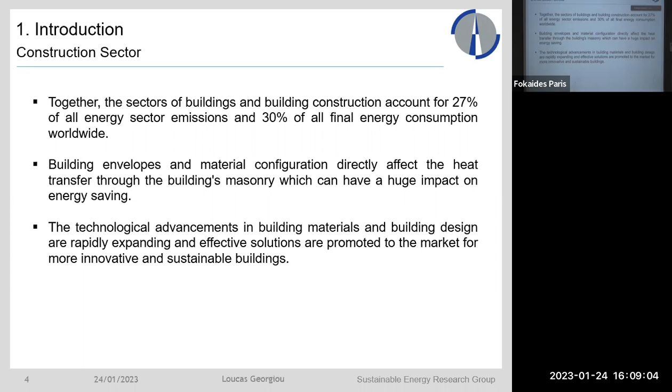Concerning the numerical tools, the concept of numerical investigation involves calculating the thermal performance of a building envelope with predetermined material properties and boundary conditions.

The need for the development of building efficiency techniques has pushed the situation where software tools can be utilized to investigate complex geometries and flow fields.

Numerical tools are utilized to predict and improve the thermal performance or capabilities of a building configuration.

This work numerically investigated three major case studies.

The first one concerns a double skin facade building element, which was integrated into the building envelope.

The second major case study was building elements enhanced with phase-change materials. And the third case study was a solar thermal system, which was integrated into the building envelope.

Regarding the double skin facade, this system is composed of two layers that allow airflow through the intermediate cavity. The ventilation inside the cavity can be natural or mechanical, and can absorb or release heat.

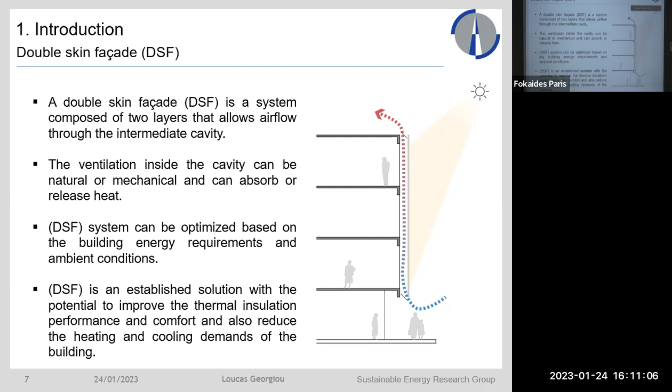A phase-change material is a substance that during a phase transition releases or absorbs enough energy to deliver usable heat or cooling. The transition usually takes place between solid and liquid phases.

Which are the two basic forms of matter. PCMs can be used in buildings to improve their efficiency by reducing heating and cooling needs. And recently, the use of PCM in construction...

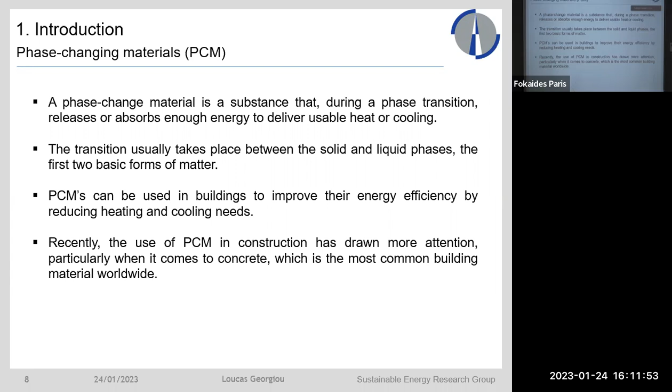Has drawn more attention, particularly when it comes to concrete, which is the most common material used worldwide.

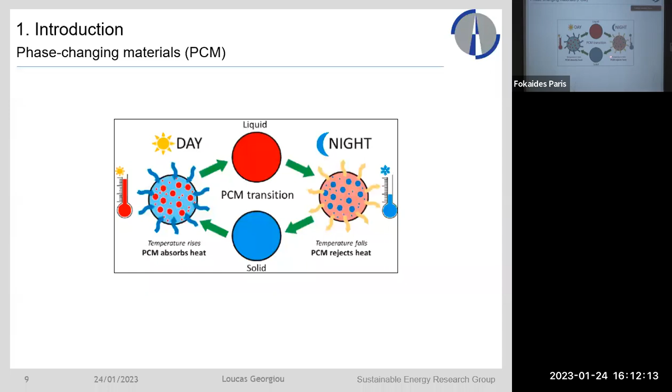Here we can see the cycle of the PCM. When the temperature rises, the PCM absorbs heat and becomes liquid, and at night, when the temperature falls, it rejects the heat and goes back to a solid form.

Regarding the solar thermal collector, a solar thermal collector is a device that collects or concentrates solar radiation from the sun.

The solar collectors are primarily used for active solar heating, or to allow for heating of water for personal use.

The use of these solar collectors provides an alternative to traditional domestic water heating using a water heater, potentially reducing energy costs.

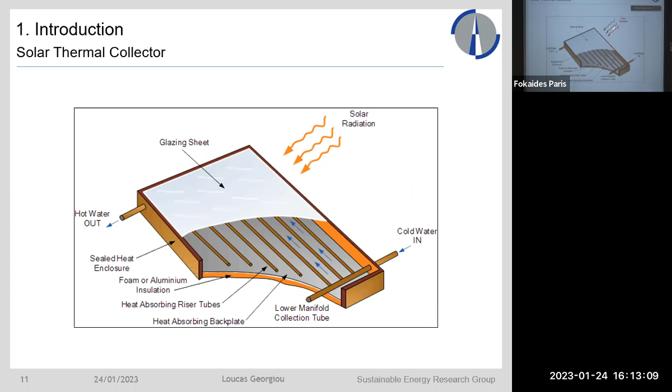Here we can see a cross section of a solar thermal collector. We have the fluid input, the fluid output, the different materials, and the solar radiation being absorbed.

Firstly, I would like to point out the innovative aspects of these case studies, regarding the double skin facade numerical model.

The double skin facade was integrated into the building envelope, and this allows for a controlled supply of air temperature through the building shell.

And controlled airflow through the building shell.

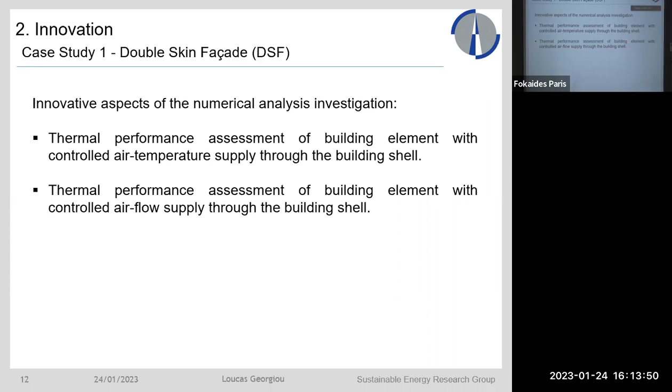For the phase change materials, we investigated them for various orientations—north, south, west, and east—and also under transient state conditions.

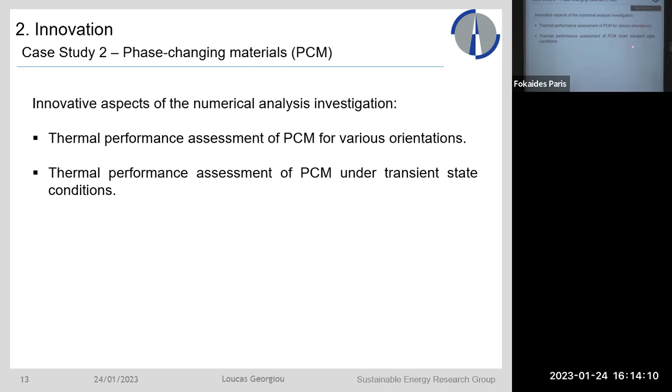And the third case study was for the building-integrated solar thermal, which was investigated for various inclination slopes, also under transient state conditions.

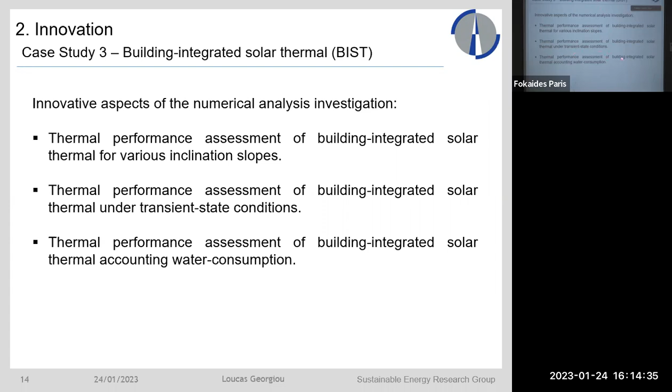And the third aspect, in which the water consumption of the system was accounted for.

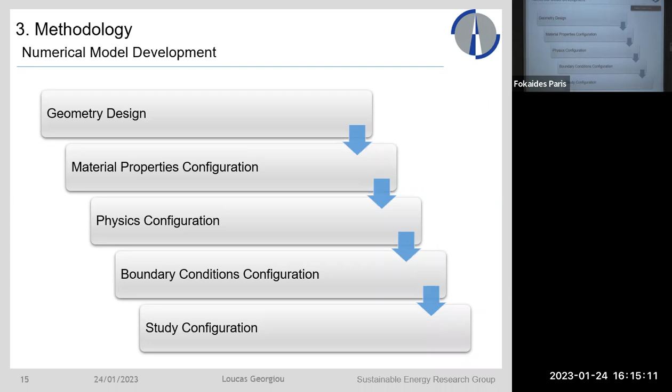Secondly, I would like to introduce you to the methodology. The approach of this numerical model development was the geometry design, the material properties configuration, the physics configuration, then boundary conditions configuration, and the study configuration, the solver of the software tool.

For the geometry configurations, we investigated 6 geometries regarding the double skin facade numerical model. For the PCM, we had building configurations with brick and stones, and they were 25 in total. And for the building integrated solar thermals, we had 3 total geometries.

What we changed in the geometry for the double skin facade was the material addition and placement and the cavity height and width of the double skin facade. For the PCM, we added and removed insulation, we changed the thickness. We also added materials and the placement of the materials, as well as we investigated the same geometries without the PCM. For the third case study, the geometry of the riser was changed, and also the riser fluid flow pattern was changed as well. Here you can see the materials used in each case study.

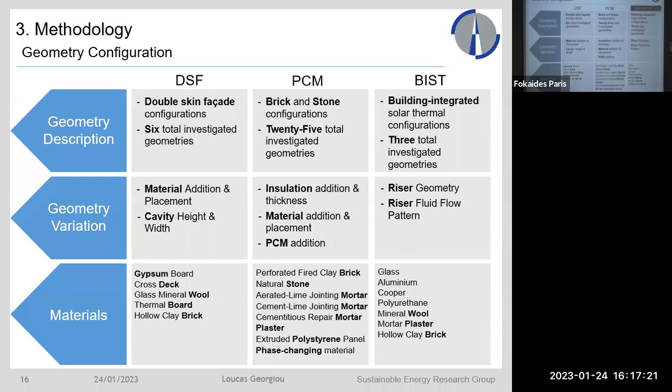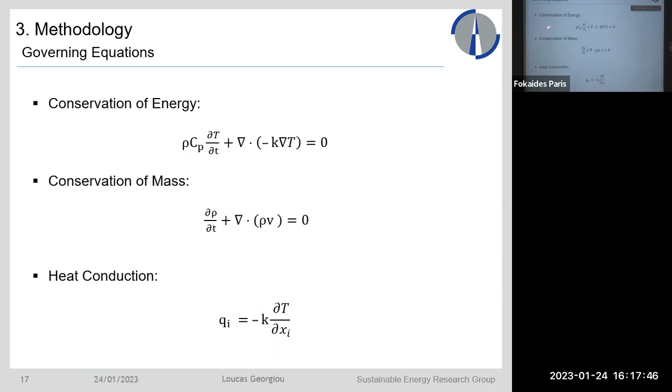For the software, we used SolidWorks and COMSOL Multiphysics, which are computational fluid dynamics and finite element analysis softwares. The equations utilized in the software were the conservation of energy, the conservation of mass, the heat conduction equation, and for the PCM case, in addition, the apparent heat capacity, where this equation accounts for the specific heat for phase 1 and for phase 2 during the phase change transition.

For the boundary conditions, for all the cases, we had the ambient temperature, which was in the form of a dynamic profile, and solar radiation, which also was in the form of a dynamic profile, and these were changed for each orientation. These data were extracted from the well-known PVGIS tool, and each model was differently configured. For the double skin facade case, we used the T sol-air formula and calculated the values of the T sol-air, and these were imposed as external temperature profiles.

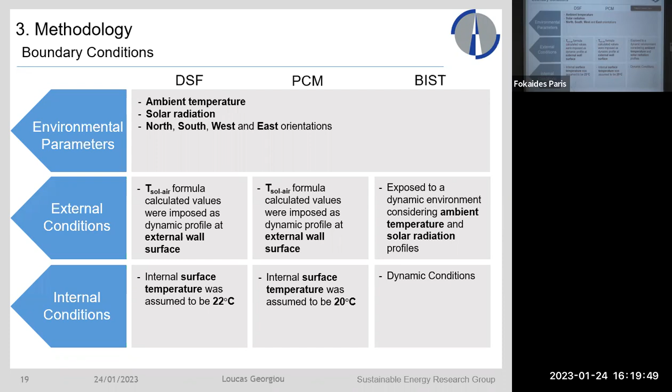Regarding the internal conditions of the first model, the internal surface was assumed to be 22 degrees Celsius. For the PCM case, we repeated the same methodology. We calculated the values of the T sol-air formula, and these were imposed as a dynamic profile at the external wall surface. And for the internal surface, 20 degrees Celsius was assumed. For the building integrated solar thermal model, these were dynamic conditions.

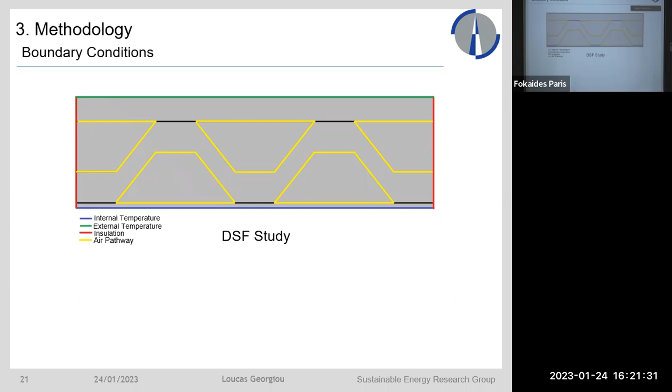For our double skin facade case, the yellow lines indicate where the air pathway was located. So this is the double skin facade integrated into the building envelope. On the bottom, we see the blue line. This is where the internal temperature was imposed. And on the top layer, this is where the external temperature was imposed. And on the left and right, we assume that no heat loss occurs, as there is a thermal insulation.

Now I'd like to proceed to the results of this numerical analysis. So for the case studies of double skin facade, we extracted the following data and processed them accordingly.

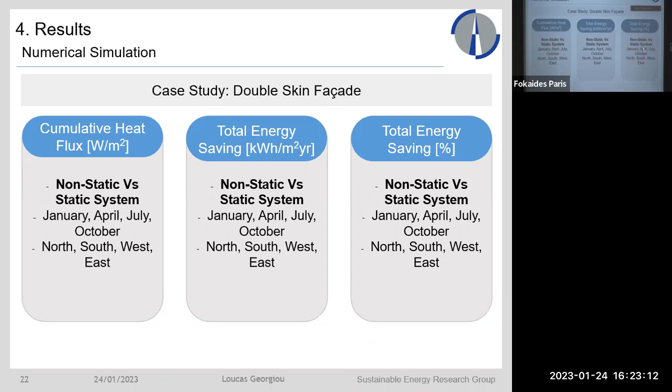So the first thing that we extracted was the cumulative heat flux, and this was done for non-static versus static system. So we numerically simulated the system without the airflow through the double skin facade, and how it behaves when we supply it with constant airflow and constant air temperature. And this was done for January, April, July, and October, and for all orientations. Next, we have the total energy savings in kilowatt hours per square meter per year, again for non-static versus static system for January, April, July, October, and all orientations, and the total energy saving in percentage for the same conditions.

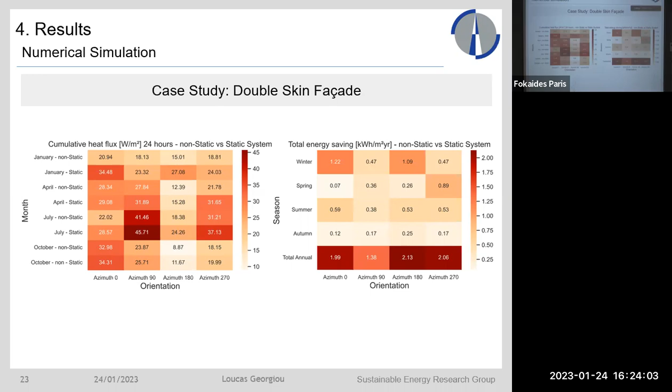For the second case study regarding the phase changing materials, again we have the cumulative heat flux, the total energy savings, and the energy payback period in years. Here we compare different configurations, and as mentioned earlier, we have configurations with brick, with stones, with different materials, with more or less insulation, and also the placement of the insulation was altered during the simulations.

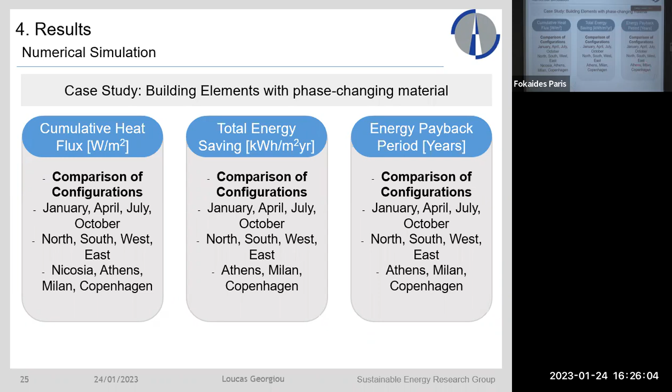And this was done for Nicosia, Athens, Milan, and Copenhagen in the case of cumulative heat flux. In the case of total energy savings, we have Athens, Milan, and Copenhagen. And for the energy payback period, we have all orientations in Athens, Milan, and Copenhagen.

The third case study was for the building integrated solar thermals. And here we observed the system fluid temperature, where we compared the systems with and without accounting for the water consumption.

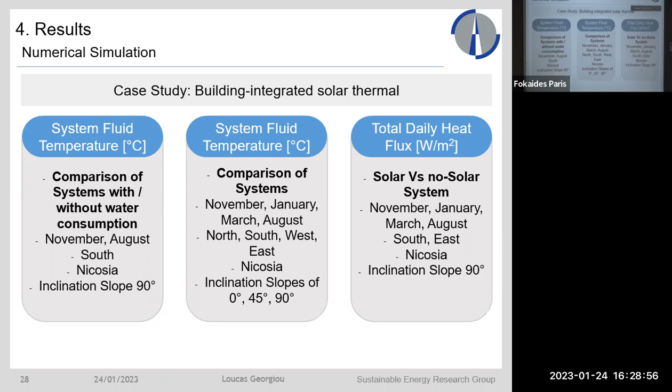On the left, you can see the average system temperature, and this indicates the uniform-riser system, the multi-riser system 1, and the multi-riser system 2. And you can see for each slope the different temperature that the fluid system achieved. And on the right, you can see the total daily heat flux inwards and outwards of the building when we have a solar thermal integrated into the building envelope and when we don't.

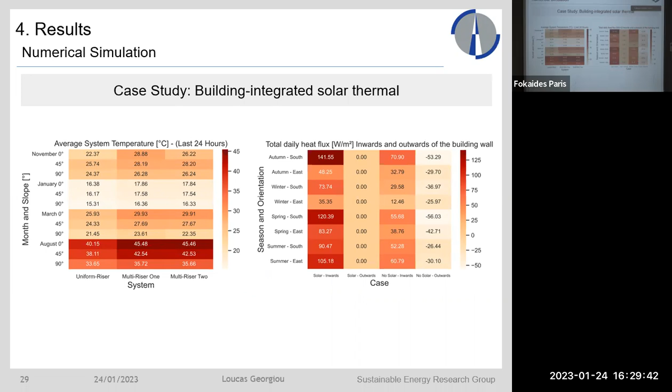Next, I will point out the major outcomes of the 3 case studies. Regarding the double skin facade study, constant airflow and temperature were identified as critical factors, significantly reducing heat transfer through the building envelope. This was the first major outcome of the case study.

The second was that the internal surface temperature of the building envelope was observed to be relatively constant under diverse boundary conditions, and this was observed when the system was in a non-static state, which means that we were constantly supplying air, constant air flow and constant air temperature through the double skin facade.

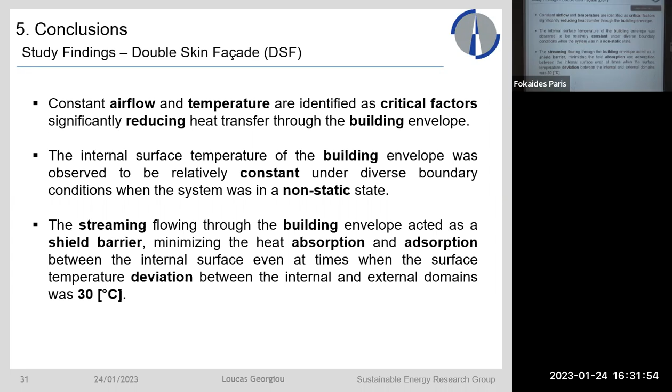For the case study of PCM, we observed that the cumulative heat flux to the building masonry was significantly reduced when the PCM was integrated into the cement-based mortar material. Also, the significance when the insulation was placed at the exterior of the masonry instead of the interior. Therefore, the placement of insulation at the external is more effective.

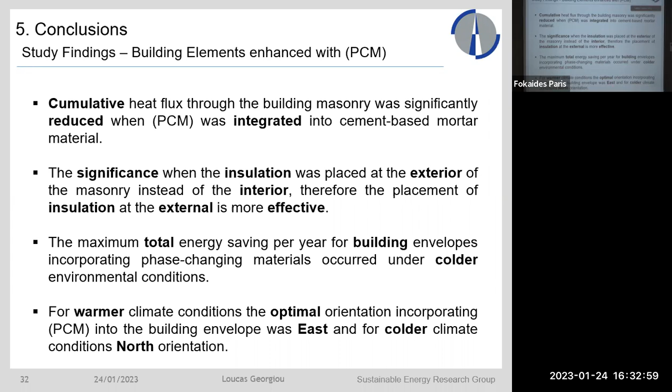The maximum total energy savings per year for building envelopes incorporating phase changing materials occurred under colder conditions. This is another observation. And for warmer climate conditions, the optimal orientation incorporating PCM into the building envelope was east, and for colder climate conditions was north orientation. These were the best orientation for the maximum thermal performance.

Finally, for the case study of building integrated solar thermal, the riser system, which consisted of a group of interconnected risers with a single input and output, was capable of heating the fluid more efficiently and achieving higher riser output temperatures. The second finding was that the study indicated that the heat flow towards building masonry when the hot water wasn't fully depleted from the system. So we had hot water, even at night we had constant heat flux going through the building envelope.

And the third outcome was that the water consumption profile consideration indicated a change in numerical results output. So the accuracy when numerically investigating solar thermal systems was changed, and is also identified as a critical factor when assessing the thermal performance of such systems.

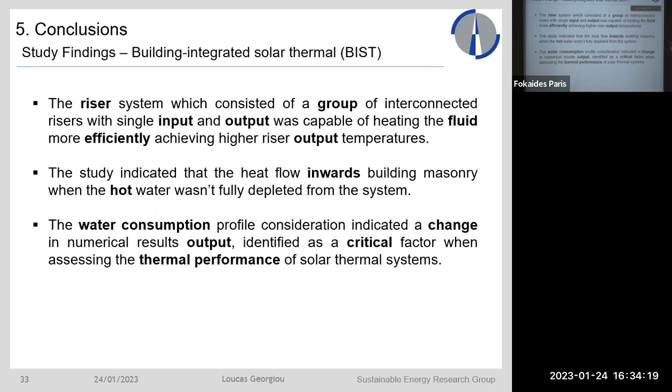Luca, thank you for the presentation. Catch your breath so we can move forward. Congratulations on your work. You have to make it bigger when talking so that we can see. Shall I? Shall I close the presentation or? Leave it, Luca. Let's just see how it goes, and then we decide in the process. Okay, my suggestion is just go around, and if everyone has questions or comments, to ask Luca.

I would like to start with some questions. I don't know, can you hear me? Yes, I think you should go first, Barry is the advisor, and then I will go last. So each one can take his turn and make comments. All right, go ahead. I'm coming close to the microphone so that it's better for the people to hear me.

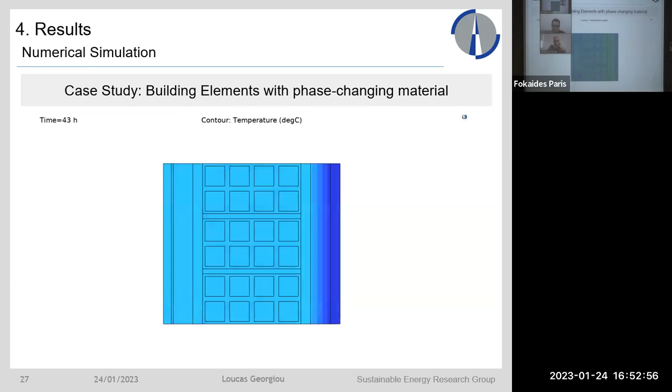So this is case study 2. Well, here you said that you have the impact of material properties, the thermal performance, insulation placement. Having this case in mind now, and going to scenario number 3, the third one you have, that's something different. Can these two be combined together?

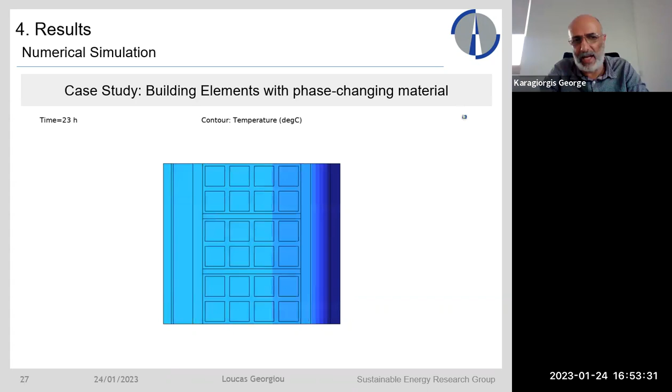This is a geometry built in the numerical model. All right, the concept of these two things. Yes, the riser on the one hand, the third case study you have shown to us, with the second case study. This one. No, this. This is an example, a case study where a multiple group of risers were interconnected. Here in this particular demonstration, we have 3 fluid inputs. I understand that. So, I am missing here because this was done with a cross section of SolidWorks. Here is missing one interconnection.

All right. Well, what was my question? Let's say I wanted to see if the know-how from the third case can fit with the second, or the know-how from the second case can come and support your third case. Okay. So can you have a combination of these two? You can have. Geometry might be different, of course.

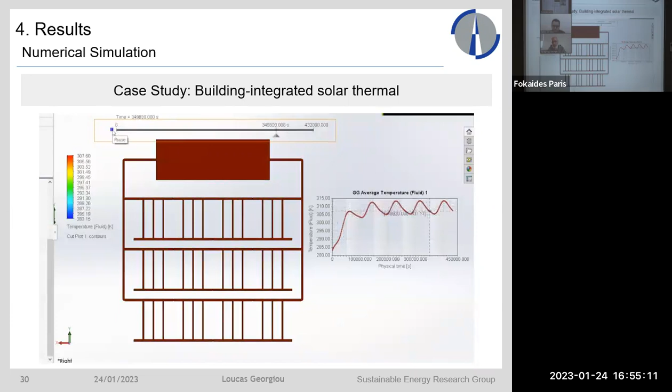Okay, so the difference is here we have a closed system. Yorgo, we may want to simplify the question because I can answer. This system is a closed loop system. This is where our tank is, and we have forced convection operating the numerical model. So this model is exposed to ambient temperature and the solar radiation. And the way we configure the boundary conditions, let me find the slide.

Okay, actually, Loucas, I understand the whole concept. I have seen that you have done tremendous work, a lot of simulations and a lot of analysis. I was going to ask you also about the validation, but the previous two questions from Andreas and from Paris covered the issue. So I will not go to validation, which is ultra important to make sure that what you are simulating reflects the actual scenario in real life. So I don't have anything else to ask, just to congratulate you for all this good work. Thank you very much.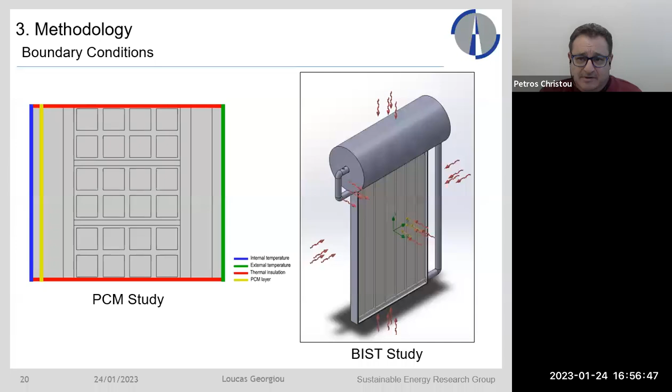Thank you. Michali, Alexandros Karalambidis is here with us in the room, Professor Karalambidis from the back. Okay. Does he want to? I think Michalis can ask questions, and then he can also jump in if he wants to have a comment.

Loucas, I would like to congratulate you on your work. It's a considerable piece of work. And I do have a couple of questions from my side of expertise. The whole aim of this PhD, as I understand it, is to assess various alternative configurations of a building or alternative building materials in order to achieve energy efficiency, meaning that you consume less energy. The economic analysis of this is very important to a potential user or investor. And if I remember correctly, you showed a slide regarding the payback period of the alternative materials.

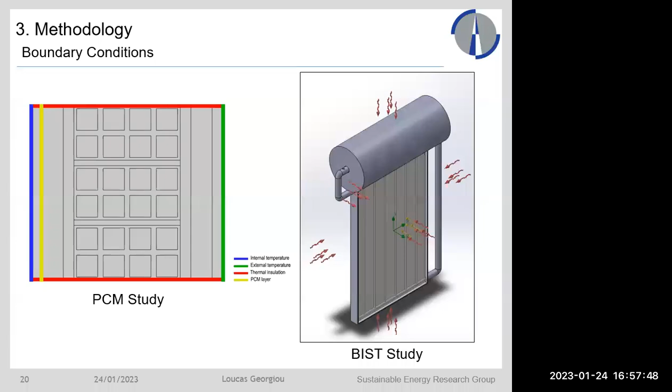Can you please show us this slide? Let me see, let me find the results. I think it's slide 23, the heat map.

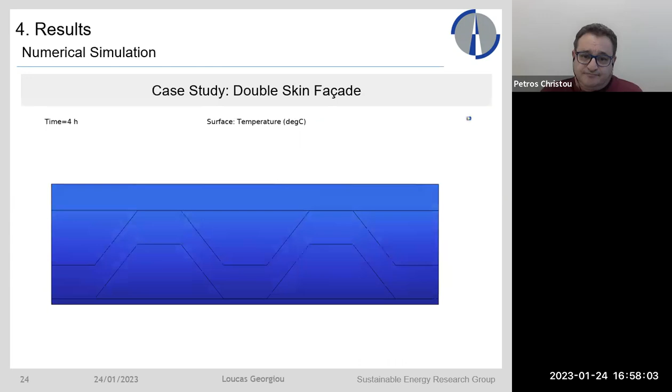It was before the crisis. So it might be worth noting that, taking into consideration the current situation of the volatile energy market, this payback period might fall substantially. Yes, this could be different. It could be a different outcome. Yes. So this is something that you should take a note of in your PhD thesis: that taking into consideration the current developments in energy prices, these payback periods might be considerably less.

Okay. Yes, but this has nothing to do with the numerical process. The outcome of the numerical model would be the same. Yes, I agree with you, but it is in favor of your argument that energy efficiency is an indicative measure to take. Yes, I totally agree. We have to always use it.

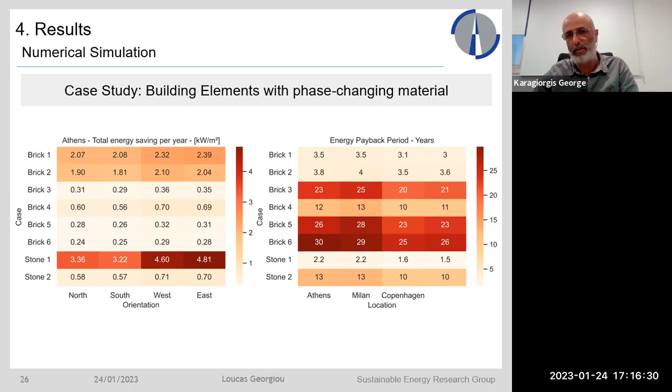Bye, Andrews, thank you Andrews. Yep, so we are meeting on the 26th, I guess, right? 27. Yes, yeah, so everything is said. It's just that I never talked to you, so just communicate through email. I look forward to that. Yeah, me too, looking forward to greeting you in Kaunas. Okay, alright, thank you. See you, Paris, bye, bye.